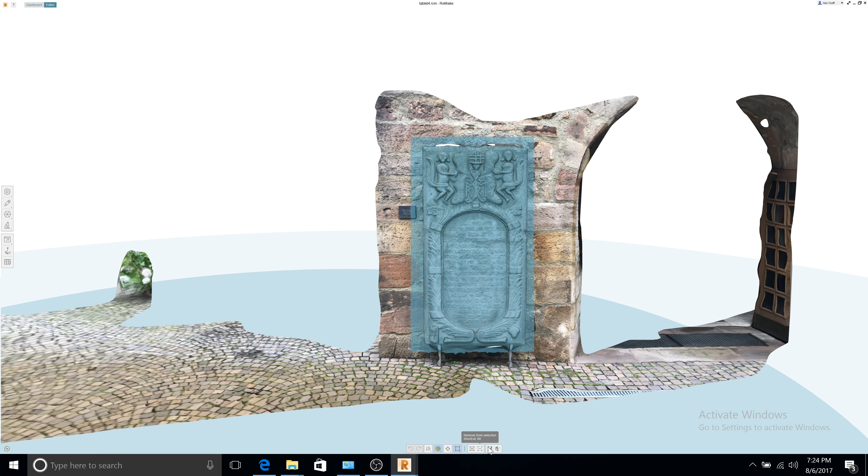and then invert the selection so the rest of the area around it ends up being selected. You can go to the edit toolbar at the left and then delete the selection so that there's only the model and a little bit of border around the outside of it. And we're going to get rid of this border in a later step.

But before we do that, I'm going to clean up all the holes here. You can do this by using the fill holes button right on the side. Now there is an automatic process that goes about this for you, but I like to do it manually just so I can see where the errors were and I can make sure that there's no errors remaining on the model.

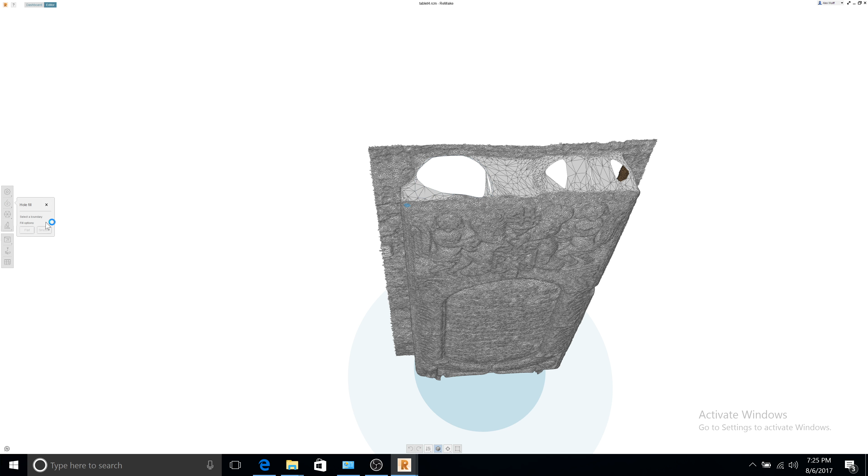I like to fill it in with the smooth function rather than the flat function because it looks better for 3D printing. It's just a little bit more natural than having it filled in completely flat. So now I'm just going to go through and fill in all these holes.

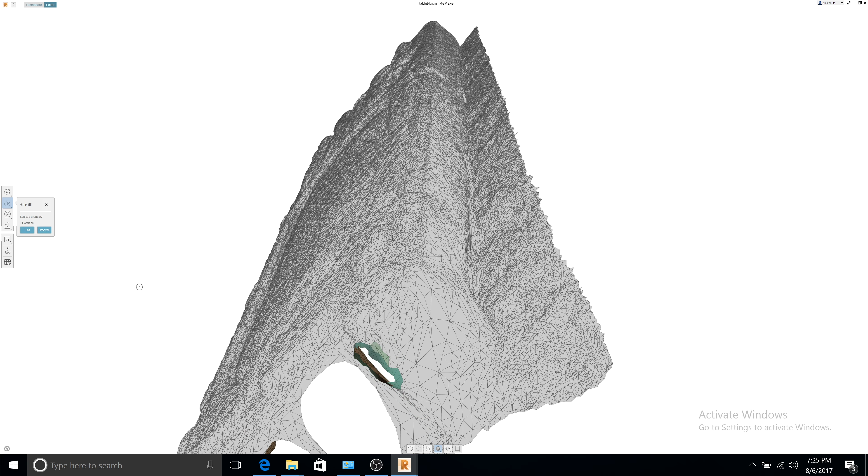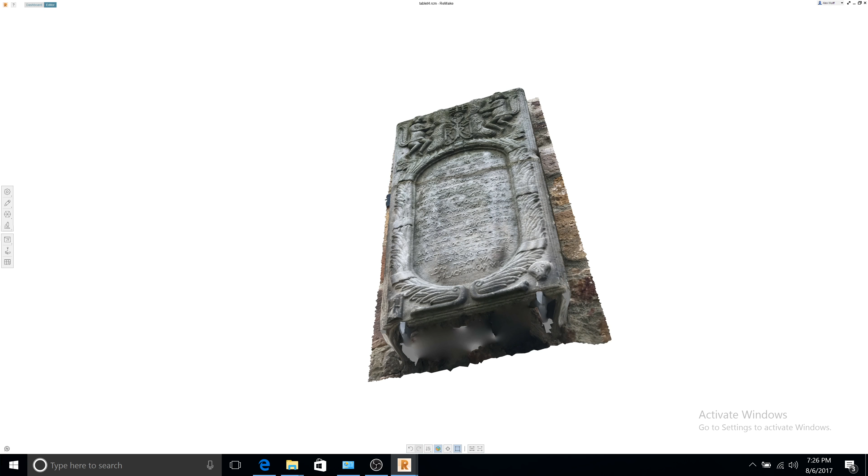Okay, so it looks like I filled in all the holes, and now I'm just going to do a little bit of editing of the mesh to make sure that it looks good for 3D printing. The only errors I'm really going to want to fix here are these two nubs that are protruding out from the bottom of the tablet that I'm going to be printing out.

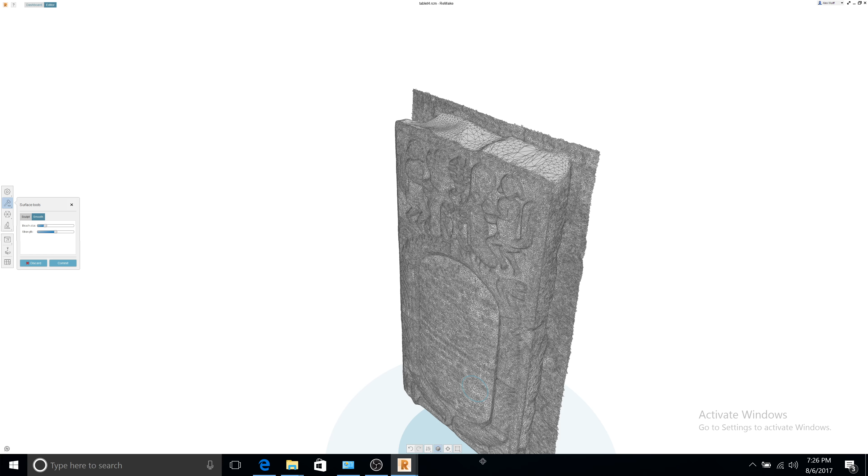So I can do this using the Surface Tools tool, and I'm going to make sure it's on smooth. I'm going to make sure the brush size is pretty small so I have control over it, and I'm just going to click this a few times and smooth it down. There's a bunch of other things I could fix, but I think in the long run, it's really not going to make too much of a difference with 3D printing.

So after this, we now need to make sure that this model is solid. Right now, it's just a hollow mesh with no actual dimension to it, or rather, it's not filled in. So the way you can fix that is by using the Slice and Fill tool. So I'm going to edit, I'm going to click Slice and Fill.

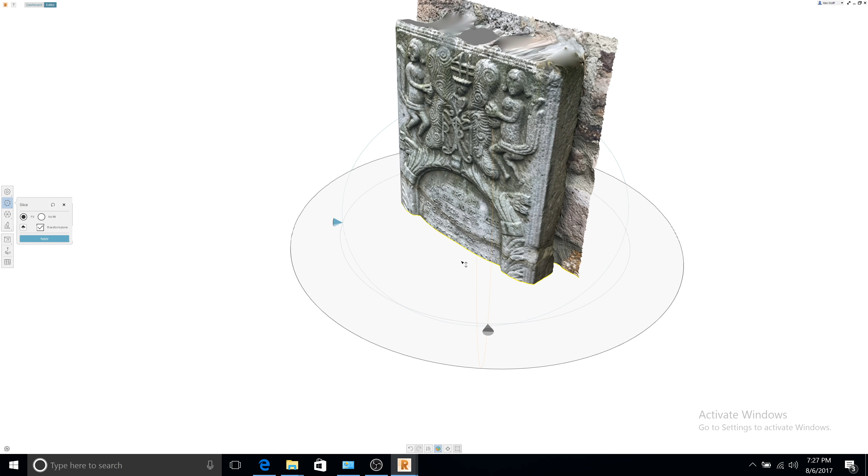And right now, it wants to fill in the bottom of the model like that, but since my model is oriented the other way, I can actually change the platform using this transform plane. Make sure transform plane is selected, and that'll make sure that everything looks good. So there's a few different ways you can do this.

You can transform it using these nubs here in large increments, which is what you're going to want for part of it. So I'm just going to turn this 90 degrees. And now I'm going to use this part to make it flat against the plane.

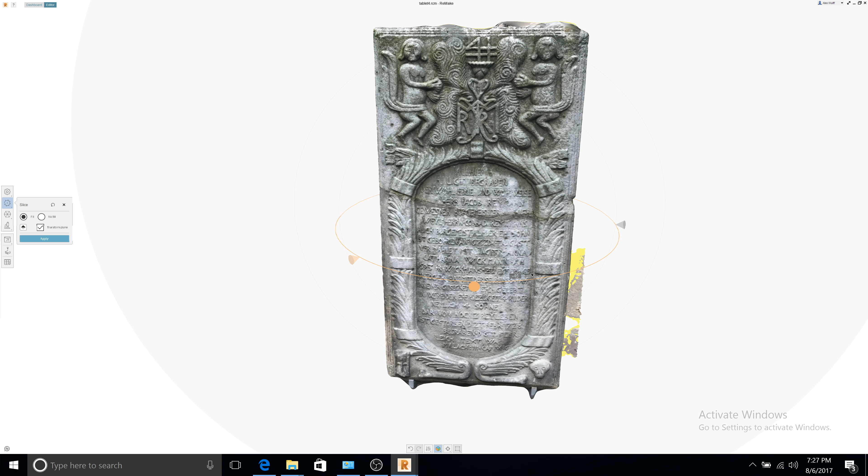So an easy way to tell if it's actually truly level with your model is to drag the plane up and find a flat surface, and then make sure that the flat surface is completely eclipsed by the plane at the same time. And you can just drag the rim on the outside to make sure it does this right.

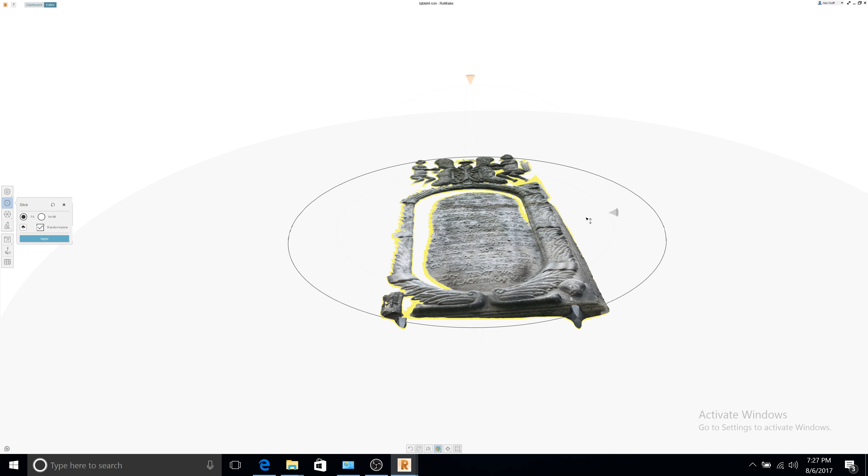So for example, I'm just going to keep dragging this up, and I can see how the top part of it is highlighted a little bit before the bottom part. So I'm just going to drag this up once more, a few more degrees. It still needs a little bit more adjustment.

And now the left is getting hit a little bit more. So we're just going to drag that a little bit. And there, it's basically flat, and that's good enough.

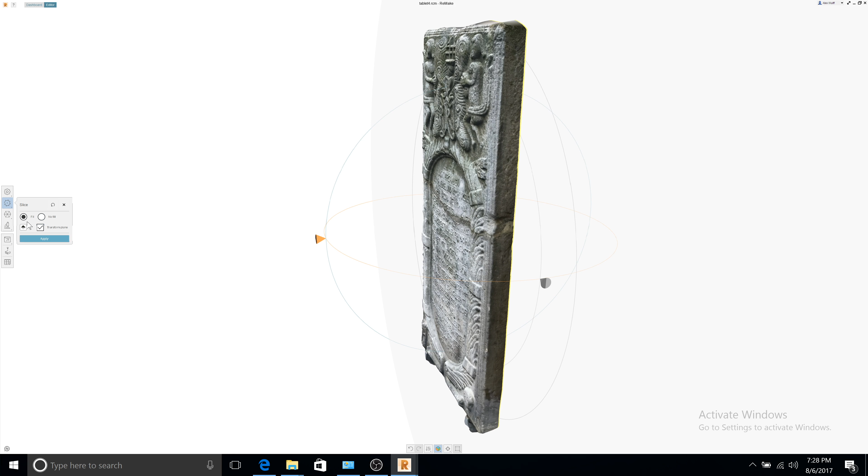So I'm going to drag the plane up about halfway up the model, because that's all the part that I'm going to want to be 3D printing. And I'm just going to click Apply with Fill being selected. It'll calculate it. It'll cut it off. And then, as you can see, if I change to a different view mode by pressing backspace, it is now a basically flat plane, which is kind of cool.

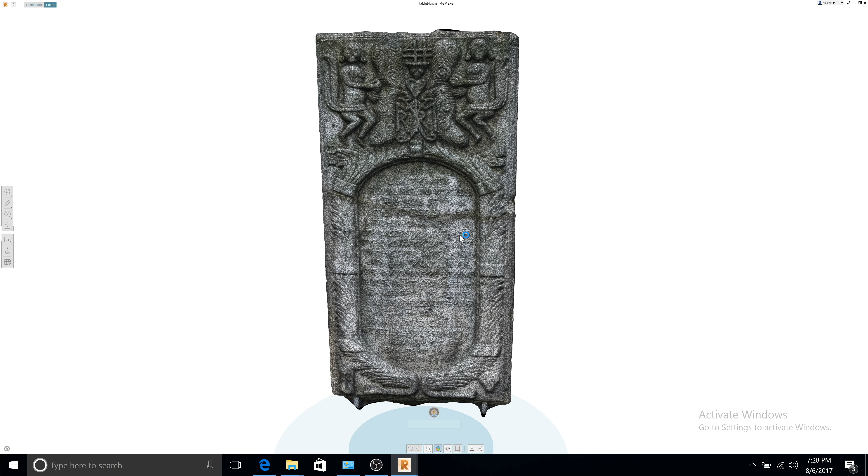So the last thing you can do before it's ready to be exported is you can use the 3D print tool to check for errors. Now, I'm not actually going to be 3D printing from ReMake just because I like to have a little bit more control in other programs such as Cura, but there is the nice print tool checking issue. So it did find an error. Let's see what it thinks.

So it looks like there's a little bit of a problem with the surface geometry, but I think that's actually going to end up being okay. So I'm just going to leave that. And there's another issue with it too. So rather than trying to fix that little bump there, I think it's going to be fine, so I'm just going to leave it. It shouldn't create too much of an issue in the 3D printing process.

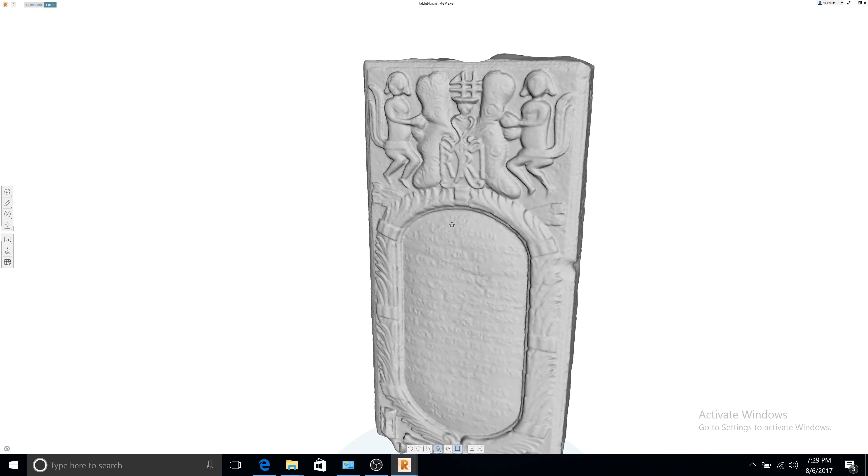So it's always good to just go around the model one last time and make sure it looks good. Now this view mode right here is what the model's actually going to look like if you 3D printed it, because there's no textures and it doesn't show you the polygons on the surface. And it looks pretty good.

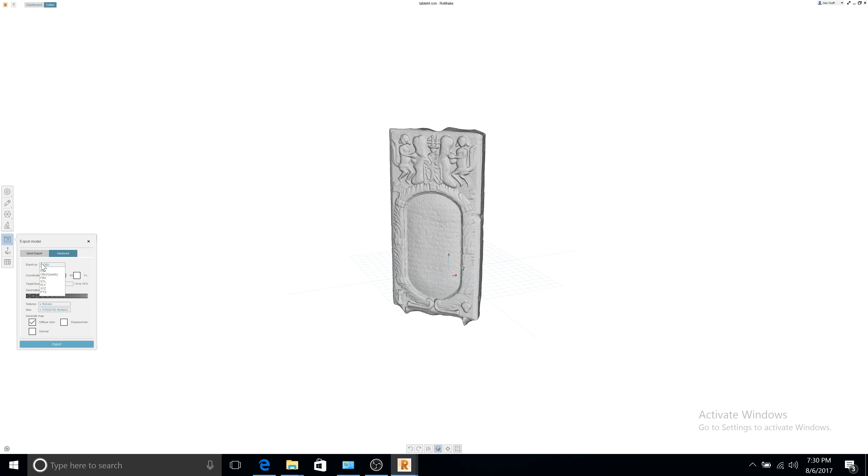So the last thing I'm going to do is click Export and then Export Model. I'm going to make sure it's on Advanced mode, so I can have proper control over it. I'm going to click Export as an STL file. Then I'm going to change the decimation percentage to about 50%. Most 3D printers can't really handle that much detail, so 50% should be more than sufficient for any printer that you throw at it. I'm going to click export. I'm going to save it to my desktop,

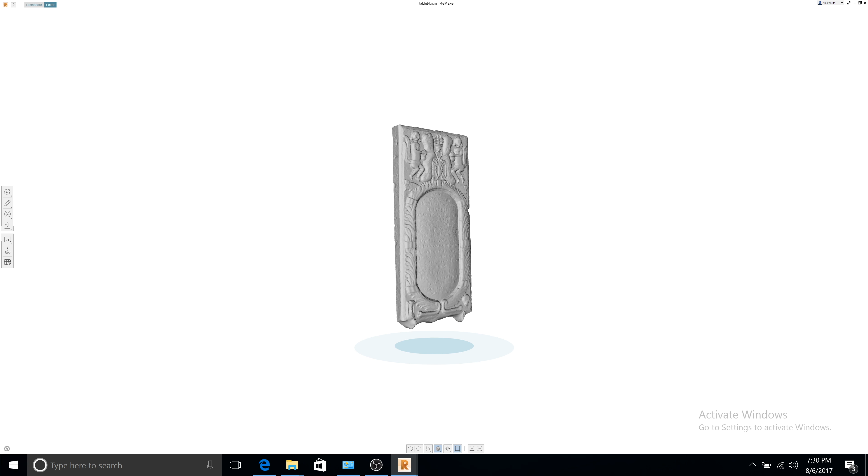and that's that. So now that this is done, I'm going to bring my model into Cura, because I like Cura a little bit better than the integrated 3D print tool. I'm actually going to switch over to Mac because Autodesk stopped supporting the ReMake version for Mac, and I do all of my development in 3D printing on the Mac OS operating system. So now you can see that I've imported the model into Cura. It almost never gets the scaling right, so you're inevitably going to have to fix the scaling of your model.

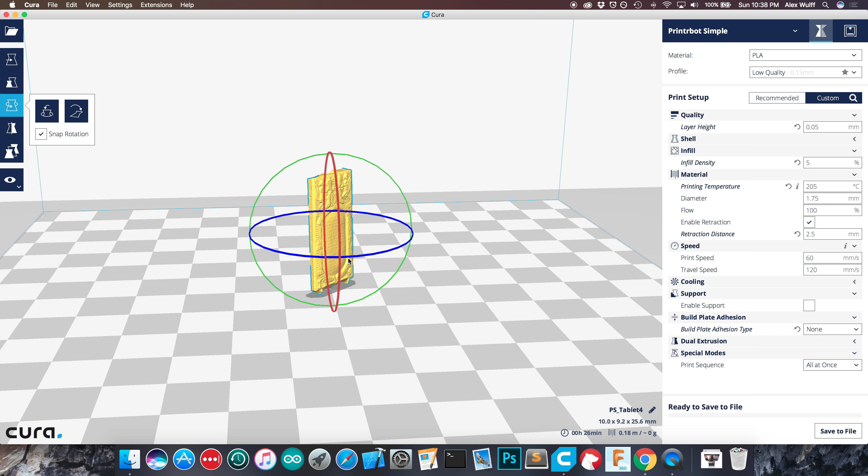What I'm going to do is look at the model, and the first thing I'm going to do is rotate it so it lies flat against the plane. Now, one easy way to do this is to either rotate it, or there is a lie flat selection. So you can do that by clicking lie flat or lay flat. And that's actually not what I wanted. So I'm going to have it rotated around once more, and let's hope it'll get it right this time.

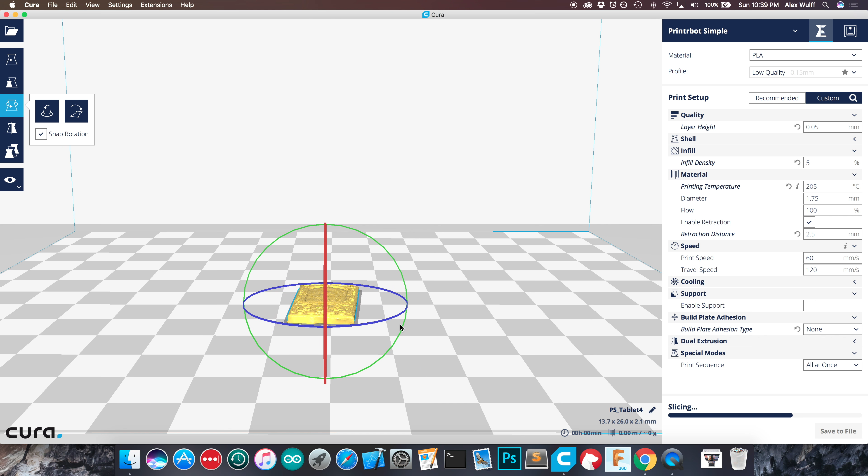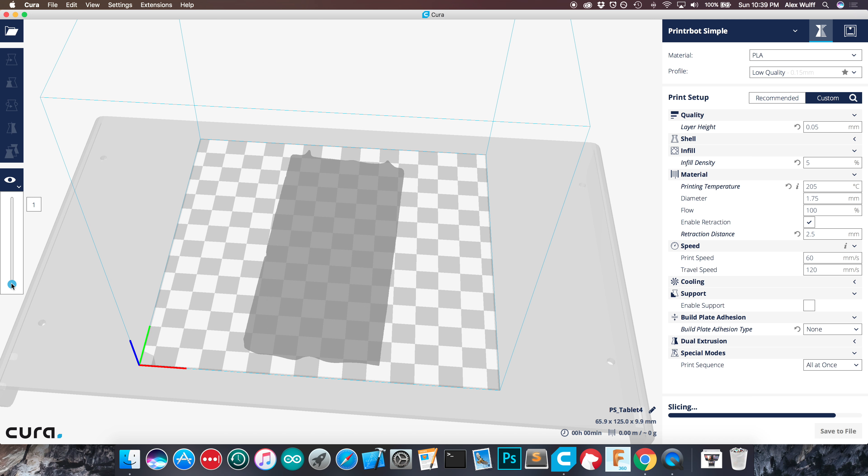That's much better. Now, the next thing I'm going to do is scale it up. It's a little bit off the platform, so I'm going to have to move it. And that is looking pretty good right there. So I always like to check the layers before I print it, just to make sure that there's not one tiny little point in contact with the platform or something like that.

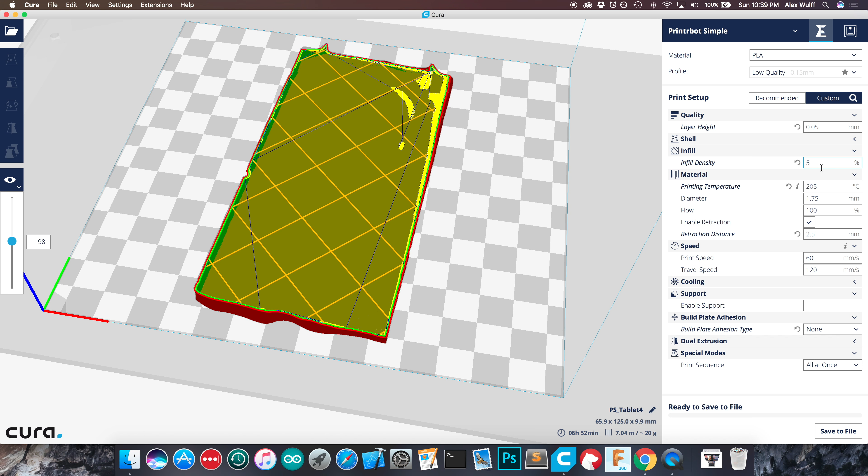So it's not going to be able to print it out in excellent detail, even if I have it at the finest layer height setting, but it's still going to look pretty cool as a finished product. I can move this down. 5% infill might be a little bit too small. So I think I'm going to change that to something like 15. And there you go. Now it looks to me like the model is ready to be 3D printed.